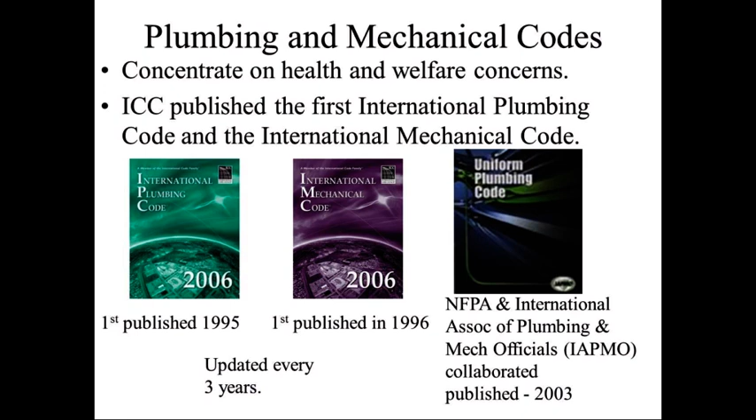If you're in construction management, you may end up having to look at these other books or be familiar with them. Typically, mechanical engineers are required to prepare working drawings for design jobs over 5,000 square feet. In the state of Texas, that's what we have to look at. Interior designers and architects can create plans, but if it's over 5,000 square feet, we have to work with an engineer.

As designers, you're not going to be required to know or research the two code books, but you should be aware of a number of plumbing and mechanical requirements, such as determining the required number of plumbing fixtures. If you're in construction management, you're still going to have to know to make sure we meet those needs.

The designer's responsibility is mainly to design the space and the placement of fixtures to make sure they're in the right location and type, and to be aware of plumbing chases and access to those. Smaller jobs may not require an engineer, but they will require a licensed plumber to produce what's referred to as shop drawings.

The performance codes refer to the ICC performance code. A lot of times these days we have to look at sustainability features, making sure we're specifying and utilizing plumbing fixtures that are sustainable, especially in construction management.

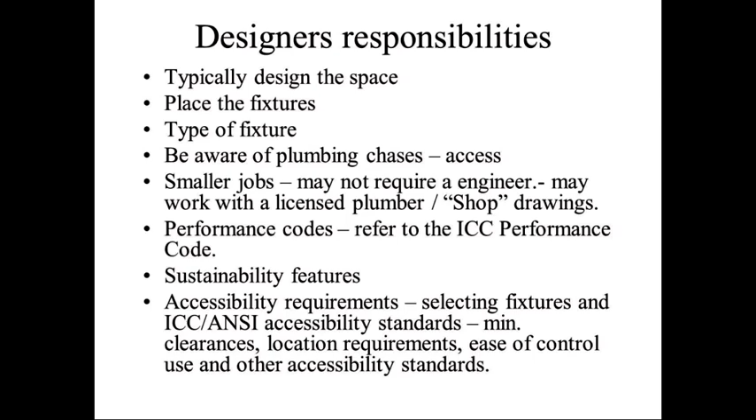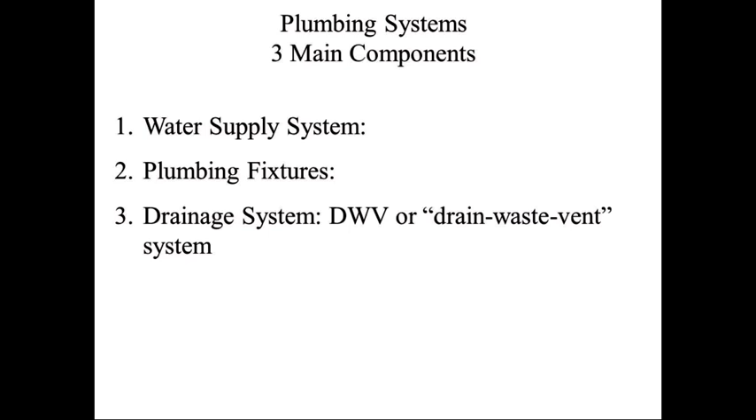So I want to make sure you understand a little bit about plumbing systems. This part isn't really in your textbook, but I think it's something all designers and construction managers should know. There are three main components: a water supply system, plumbing fixtures, and the drainage system, which is often called drain, waste, and vent, or DWV. Let's talk about each one.

Your drainage system, or drain-waste-vent system, consists of wide pipes since it operates on gravity. This is where all the water goes down the drain - when you flush the toilet, that's your drain-waste-and-vent system, starting at the plumbing fixture and ending up at the public sewer system. This is something you need to be aware of.

At each fixture, there are traps that are used to prevent odors, gases, and insects from coming back up. You've probably been in a restroom sometimes and thought, 'Oh my gosh, what is this odor?' and nobody's even used the restroom. That's because it gets very dry from not being used enough, and pouring water down the drain can help put water back into that trap.

You're going to see that there are branch and stack pipes required to transport the used water from the trap to the sewer.

A lot of times you're going to see soil stacks that carry solid human waste, and waste stacks carry other waste. Then there's vertical stacks, vents that penetrate through the roof of a building, allowing harmful gases to escape as water is discharged.

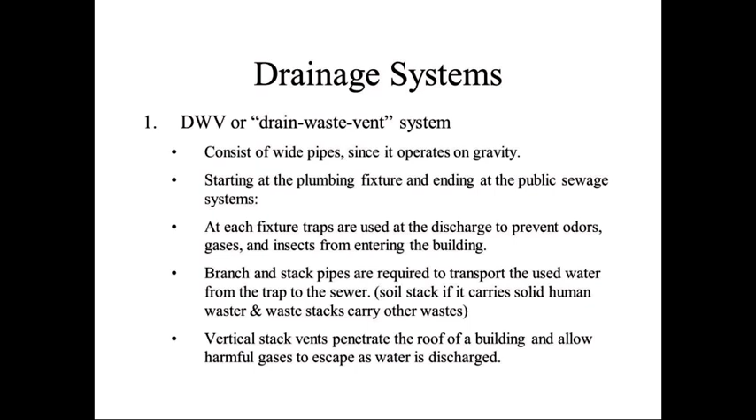Let me show you a visual. Here we are in the diagram, and you're going to see that if we have a water closet, or toilet—as a designer or contractor we call them water closets—there is a drain underneath those. Even under the sink you see there's a little trap, and the tub has a little trap too, and it all goes to this one soil stack.

It's normally a 4-inch soil stack, depending on the number of fixtures tied to it. You'll notice this soil stack, the darker line going vertically, goes straight up through the roof vent. That's where that off-gassing escapes.

You'll also notice next to it a lot of times is a 1 1/2-inch vent stack, because you've got your sewer lines running. This is your main stack where the sewer runs down through here, but this is an additional vent stack that ties up through the roof vent for the off-gassing.

In through here, you'll see where this is vertically sloped to go down to where your street sewer is. Everything has to go by gravity toward that street sewer. So when you're planning a building, you've got to make sure the street sewer line is lower than the house line if you're pouring a concrete slab.

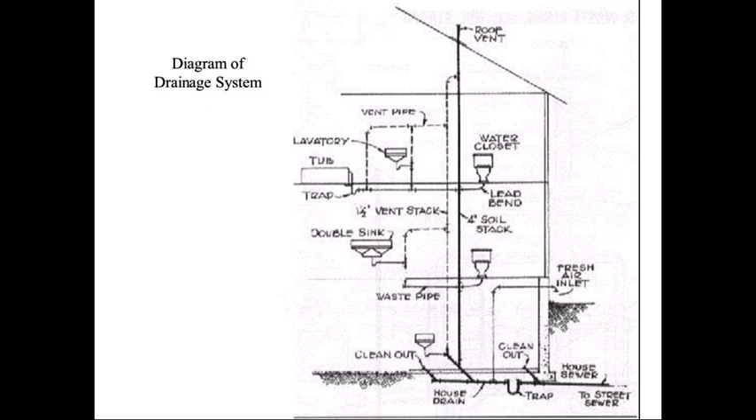Okay, so this is a closer version because I want you to be able to see this. This, of course, is the trap—there's usually one at each of your fixtures. So it goes through here. There's a vent; it comes through and ties into this particular vent stack, and that ties into your soil stack. But you'll notice how your drains angle down.

That's where you have to have a 1/4 inch slope to your soil stack for every foot. Okay, 1/4 inch for every foot.

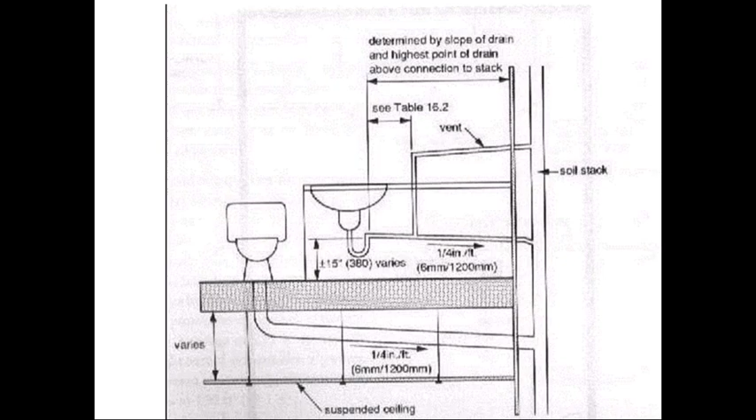This means that when you're planning out where your fixture may end up, there's a distance between that and the ceiling of your next floor. How far it is may make a difference on how big that plenum space—the space between the ceiling here and the floor above—needs to be. You've got to make sure you have enough area there for that to flow into the soil stack, so a lot of times in designing you have to take that into consideration.

The water supply system consists of small diameter pipes that use pressure to convey either hot or cold water, of course, when it comes from the street. You'll notice that in the street, the water line is always above the sewer lines—that's so that the water is never contaminated.

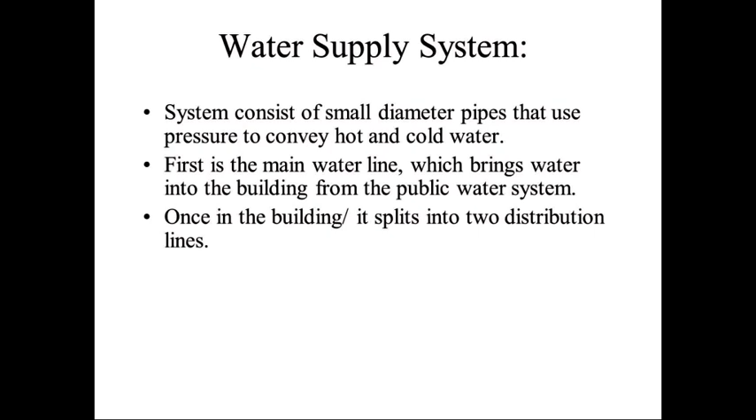First is the main water line, which brings the water into the building from the public water system. Once it's in the building, it's split into two distribution lines.

One line leads directly to the plumbing fixture, because some plumbing fixtures only need tap or cool water, like your water closets and toilets, which don't need hot water. But the other line leads to either a water heater or a tankless heater, then it's distributed to a fixture, because sinks, dishwashers, and other fixtures need both hot and cold water.

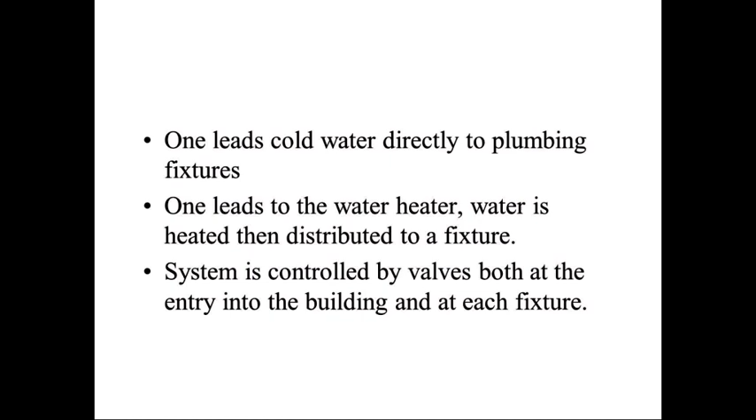The system is controlled by valves both at the entry into the building and at each fixture, so you could cut or turn the valves off at the fixture if you needed to stop a leak at the sink, at the water closet, or a leak into the whole home.

You could turn the valve off and it would stop the water from flowing. We talked a little bit about either a hot water heater or a tankless water heater.

This is showing you how a tankless water heater works. A lot of times most of them are gas operated. There are some electric ones, but they're not near as efficient as they should be. These gas operated ones are usually mounted on the exterior of the home, and it has to be well vented. Here's the gas line going into it, so you can see where the burner is, and the cold water is coming into it.

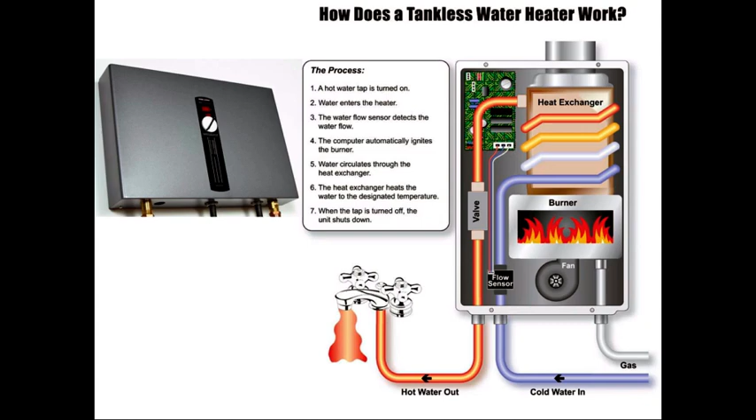So the water enters the heater, and a water flow sensor detects that there's water flowing through. This computer automatically ignites - you see the little green computer part - and the water circulates through what's referred to as the heat exchanger, which gets the water hotter and hotter, and then it goes through a valve to the fixture itself. That's how the tankless water heater works.

When we have a hot water heater, it works kind of the same way, but this is all water that has been heated. It's like putting a pan of water on top of the stove, and it stays warm at a certain temperature based on what you set the hot water at.

You'll find that a lot of times you run out of hot water because this tank may not be big enough, so there might not be enough water. It's just like trying to make hot chocolate on the stove when you only have so much water in that pot - you've got to make sure you have sufficient amount.

So sometimes you may have to wait until your water heater reheats more water. Now, hot water heaters can be gas, and if it's gas, it has to be well ventilated. You'll find that if it's in the interior of the home, there's another vent that goes through the roof and is ventilated to the exterior, so no gas goes through.

If you put a hot water heater in your garage with any type of ignition, the height cannot be less than 18 inches, because if you were to drop gasoline on the floor, the fumes would ignite and start a fire in your garage. So it has to be raised - your hot water heater has to be installed at least 18 inches AFF, that's above finished floor.

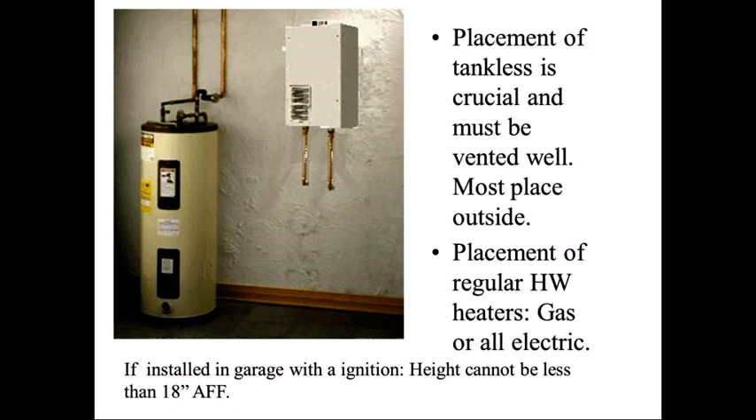This is showing you a diagram of a water supply system. I wanted you to look at this because when I worked in restaurant design, we would have to do diagrams to show the plumber where the hot water lines were coming in, where they're not coming in, where the cold water lines are, and the valves and check valves. You'll probably never do one, but I want you exposed to it.

All these lines are coming in, remember, from your main water line, and these are cutoff valves that are used, and it goes through a meter - you see where the M with the circle is a meter. Then you see tee turned up, tee turned down, elbow turned up - this is where it's turning up in a wall, or coming up through the slab to go to a fixture, appliance, or hot water heater, and then tee turns down to go back into the slab, from the hot water heater to the other appliances. So that's just showing you how one works and looks.

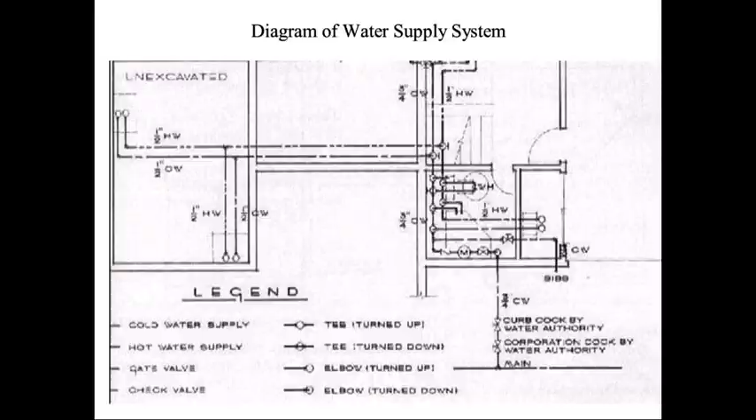Plumbing fixtures are kind of the beginning of the drainage systems, and we know fixtures are the end source for the water supply.

These consist of water closets, lavatories, urinals, sinks, drinking fountains, bathtubs, showers, dishwashers, clothes washers, and any other miscellaneous fixtures you might have, like a hose bib outside.

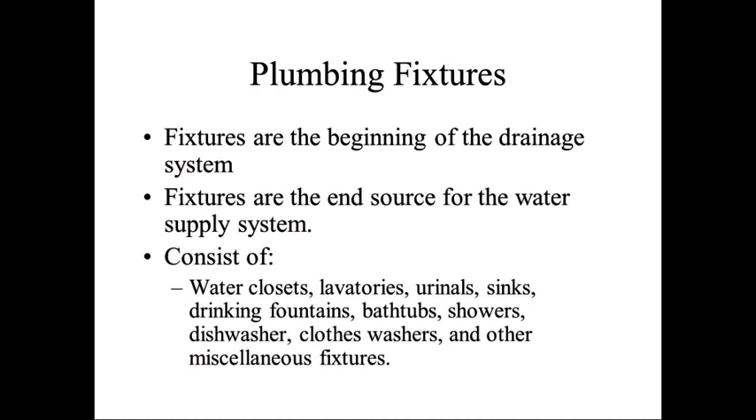There are some pictures of plumbing fixtures. One of the things you have to do is make sure you understand how that water comes into the fixture and where the drainage goes out of the fixture.

A lot of times you have to do research to know what the shape of the fixture is and where the water comes in. Here's where the water comes into this particular fixture.

You can see it on the wall here, and it goes through, and then it enters and goes through the floor. So knowing the dimension is important, because if you're designing something, it states how far you have to have that particular plumbing fixture from the wall.

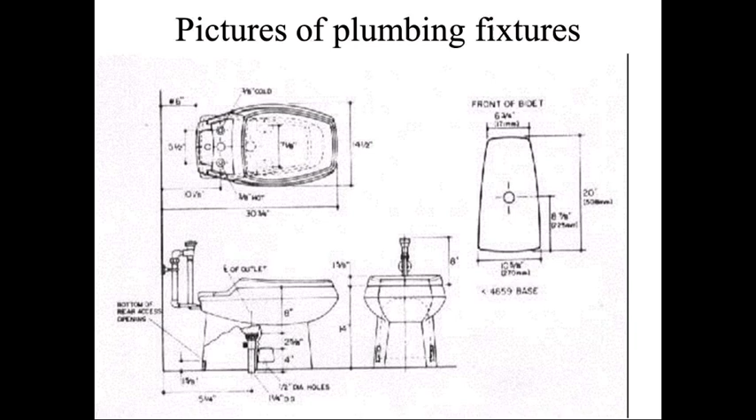Sinks are the same way. Where does your water come in? You can see the circles up at the top. And where do your drains need to be placed?

They may not be side by side. They may be at an angle or different types. You may have one sink that is deeper than the other side.

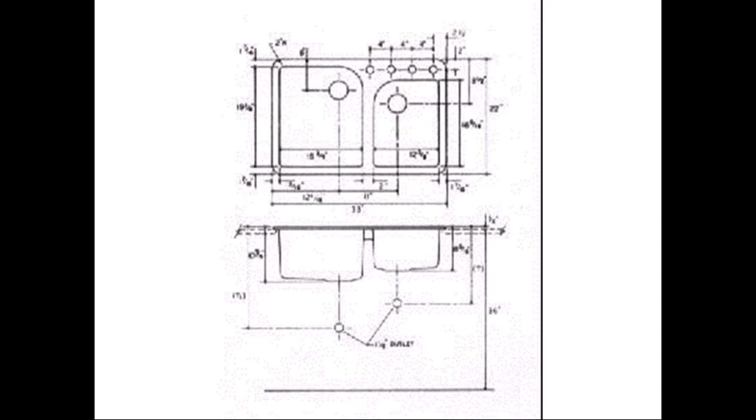So that may make a difference on where your drainage is placed and where it's going to be turning back into the wall. That means the cabinetry you design may take on a different flavor, because you can't put what you wanted to under the sink.

One of the things I want you to do is go to the website of Kohler, Kohler.com, and look at all the different specs that you have.

Go to kitchen, bath, Kohler, bathroom, elongated, and look up Persuade, Circ, Comfort, and look through the specs.

I want you to pick a color, tell me the list price of that fixture, tell me the water conservation features, give the dimensions, price, features that go along with it, color options, and download the dimension sheet.

You're going to learn that sometimes the fixtures you select come in two different components. Sometimes it comes where it doesn't even have a flush valve, and you've got to spec that.

Some of your water closets do not even come with a seat. So you've got to make sure that all of these components, what you're specifying, is all put together.

In addition, I want you to locate a sink and give all the same information: the manufacturer's name, the product number, and the colors you can get it in.

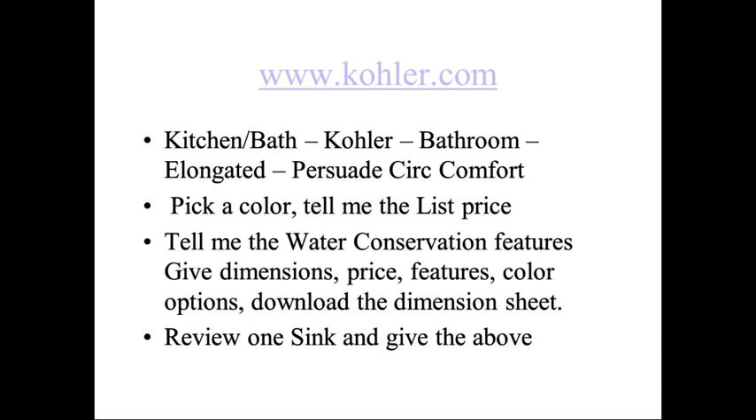Give me the list price, the water conservation features, anything like that you can see, and download the spec sheet. You will see there's an assignment in Dropbox for that.

So, to review, specification sheet with dimensions: the page, name, number, product, water conservation features, give dimensions, features, color options, etc.

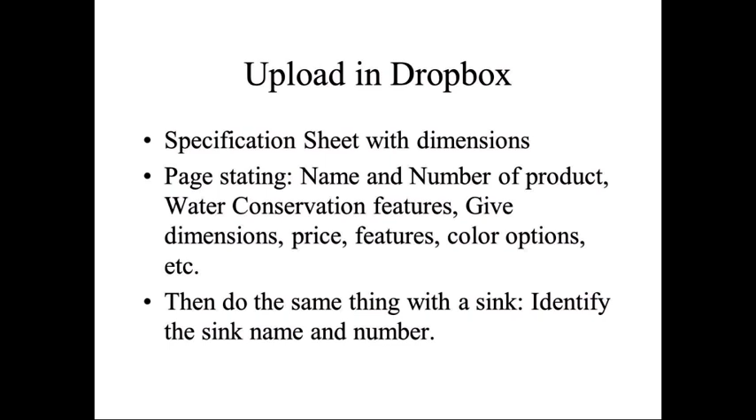Then do the same for a sink. Identify the sink name and number, etc.

This is just an example of looking at the Adair, because you're going to find it's a one-piece toilet. It may be one piece, the tank and bowl into a seamless unit. It talks about it being elongated.

It has 1.28 gallons per flush. Sometimes some jurisdictions may have real strict restrictions on how many gallons per flush you can have, which is the GPF.

You've got to make sure that jurisdiction, sometimes like in California, in areas that have a real hard time with water, is going to go through and look at these kinds of things.

So you've got to make sure that you are meeting the needs of that jurisdiction. It's going to tell you if it's a left hand trip lever or right hand, and that may make a difference on your design, so you have to look at that.

So it's going to be a standard installation, the rough-in. You would go back and look at that.

A lot of times you see the symbol WaterSense, which gives you an idea that it's more sustainable and uses less water.

So I hope this has helped you so that you could go through and start on specifying plumbing fixtures.